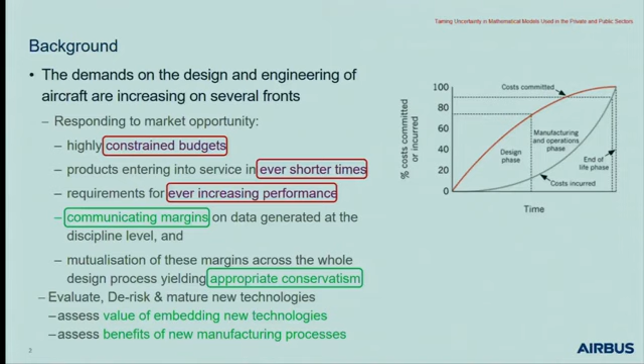But in order to do that, we want to be able to learn as much as we can earlier. And we feel that UQ, uncertainty quantification, is one technique that not only helps us understand where the uncertainties lie, but also helps us learn about what the product might do as it comes into realization.

So what I've done here is highlight the external influences in red and the internal things we're doing in green. Just a quick mention about sharing information - you're right, it's quite often human beings dealing with sharing information and working around the data. But what's imperative is to know what assumptions are in the data itself.

So the key part here about communicating margins is one way of making that explicit, because if we leave that implicit, then we don't actually know what has been done in the past, what margins have been applied, what uncertainty has been taken care of, and we may find that we're over-adding the margins all the way through.

One of the things we want to do is come up with appropriate ideas of what the uncertainty is in the data we have in real terms, as opposed to it just being compounded over and over again. So those are the things we want to be able to look at.

Why do we want to use uncertainty? Well, we don't actually know what the future is going to give us, especially when we're looking at new technologies. So we want to be able to look at the value of embedding those new technologies into our products, and what benefits they might give us in terms of performance of the vehicle, in terms of the viability to buy and operate the vehicle, and so on.

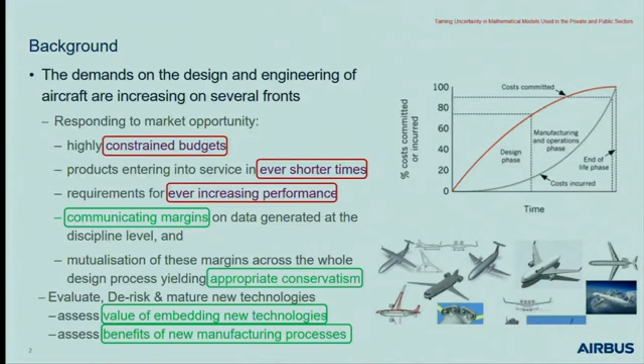So if we're making sure we've committed that right 80% in the right direction, then of course we're going to end up with a product that we actually want and the market wants as well. So we're also looking to project those things forward.

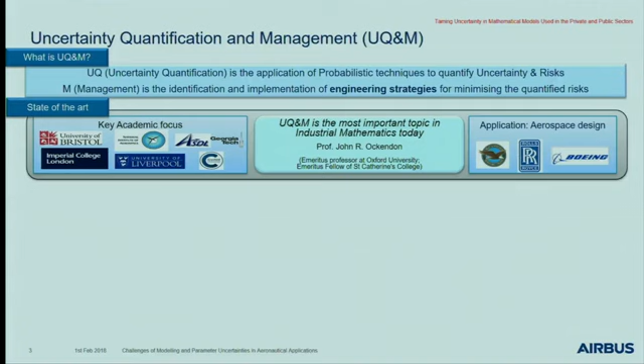So this is taken from a management slide, so bear with me, there are some very basic ideas here. But the key thing we want to put across is that uncertainty quantification is more about the probabilistic approach. And we also use the term management - UQ and M.

Management is about having got that information, what do we do with it? And this is quite a difficult question, because how do you communicate that some analysis has taken place using statistical language, to a bunch of decision makers who may not necessarily be engineers?

Getting that information across that wider group, but backed up by the right level of information, is quite a critical thing for us to do. So the question is, having done all this analysis, so what? What do we need to be able to do with that analysis? And it's a critical part we've been looking at as well.

We've been working with a couple of key partners: University of Bristol, Liverpool, Imperial College, and across the ocean to ASDL at Georgia Tech as well. In terms of the application areas, we know we've got Lockheed Martin, we know we've got Rolls-Royce working on this, we've just seen the results of those. And of course a competitor is also using these techniques too. So within the aerospace industries, it is a growing field.

I think it's an important point from Professor John Ockendon. At the last study group for uncertainty quantification, he made a statement that uncertainty quantification is one of the key topics we need to be looking at from the industrial mathematics side. And I think it's the sort of presentation that Catherine gave earlier that indicated how that is going to be used. So the thing I'm feeling a bit guilty about is the simplistic middle bit about what this actually means, so I'll skip over that.

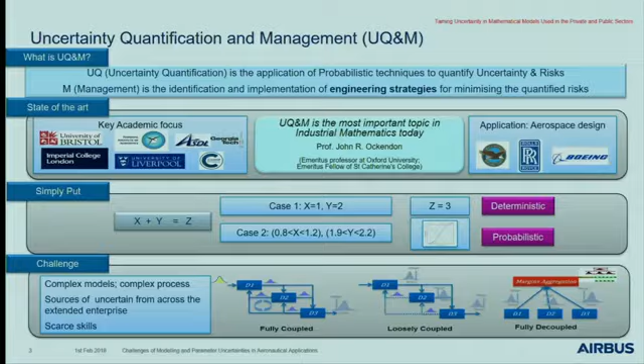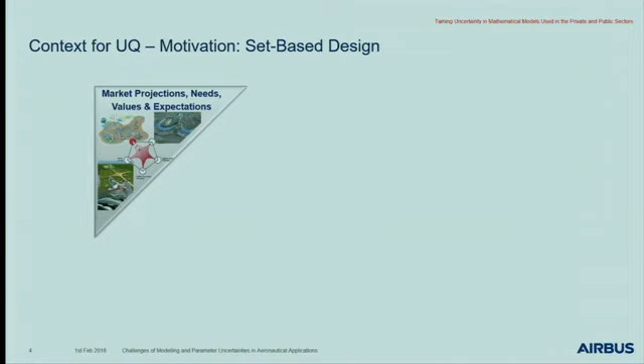I mentioned we're going to talk a little bit about overall what we do, so I've got this as a cartoon which we'll bring through here. It's about the conceptual design, and in the conceptual design phases what we're looking to do is identify a set of products that meet a specific market need. This need may not be expressed as a requirement, not hard and fast. It may be linguistic and vague in the way it's expressed, but there will be some expectations behind it, and some values being sought by it as well. So this creates for us a product placement scenario.

This is what we would like to be able to put in the market to go into place in, say, 10 years' time. So what we can do with that is start thinking about some of the concepts in terms of what the aircraft might look like. But we also have a portfolio of technologies we're working with, and we'll talk to our friends at Rolls-Royce and say, what sort of engines have you got in mind, and how can we use those engines on our aircraft as well?

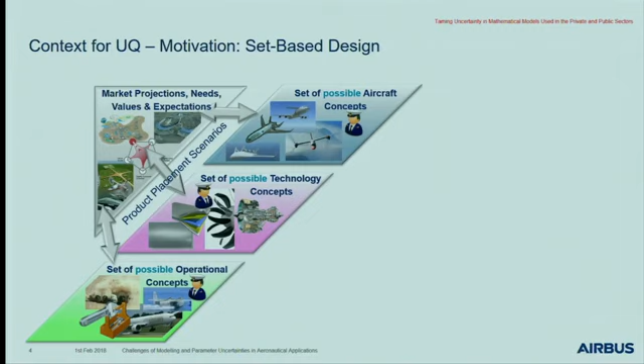And there will be uncertainties associated with that, as we heard earlier. There's also future operations always taking place in terms of how it's going to be operated. By operations, I mean much wider - not only how the airlines will fly the aircraft, what the air traffic control environment might be, but how we might support, maintain, and produce the aircraft. So different concepts are coming through here, and if we take a sum of all those, we can end up with a large number of aircraft concepts to analyze in that multidisciplinary way.

Showing that as a set of axes here, each blob represents an individual aircraft that has a specific technology embedded in it, a specific way of maintaining it, and a specific shape associated with it. What we want to do is use some rapid methods to say which ones are not feasible. So we're not going to make a selection and say this is the aircraft we want to design - what we're going to say is these are the aircraft we don't want to design.

In the literature this is known as set-based concurrent design, or set-based design. The idea is that you always leave yourself a number of scenarios that are still feasible by only getting rid of the ones that are unfeasible. The danger of picking one and finding later that it doesn't quite work is wasted effort, and you have to come back and redesign - so it can be a costly task.

From those we can then create a set of feasible solutions, and because we've narrowed the set from a very large one to a smaller one, we can increase the depth of calculations necessary, and go into deeper calculations, as Catherine showed, with the finite element approach, computational fluid dynamics, and those sort of models. From that we can come up with a feasible set of competitive products that we want to use.

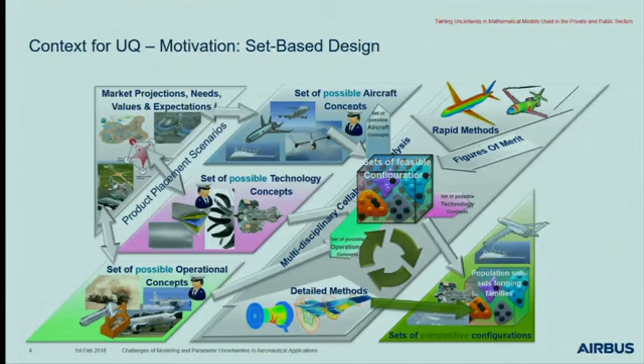Now what I want to do is take a case study of how we apply this by looking at the rapid methods part, looking at the early design, and being able to pick out a large number of engine configurations and airframe configurations, showing how we use these methods to home in on suitable and feasible solutions. I also want to touch a little on the graphics we produced to show what this means and how we might use these things as part of decision making.

So the simple case study we're going to look at is an aircraft that's taking off, going into transition phase, reaching climb, and then going into cruise. One of the things we want to ensure is that the aircraft can fly 24/7 - essentially that means we want to reduce noise. Because we want to operate it on a regular basis, we also want to reduce emissions, and reduce the fuel burn associated with this. So the terminology you'll see is SL noise for side line noise, FO for flyover noise, and fuel burn and NOx will come through as emissions.

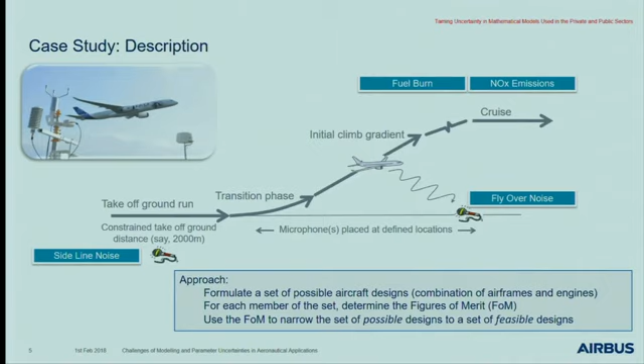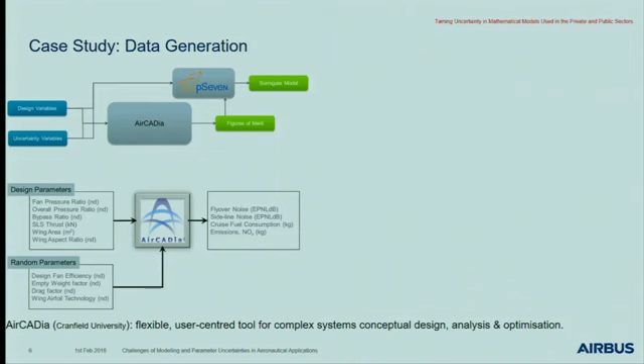So to do that, the first thing is that we generate the data. AirCADia is a computational tool, or framework, from Cranfield University - we used that, and we also used a tool called pSeven, which allows you to do surrogate model building. It's got a number of ways of building surrogate models, and it includes Gaussian processes as well, which we use here.

Now what we've done here is to separate out our design parameters from our random parameters. The reason for this is that we want to treat them differently when we do the full analysis. Design parameters are parameters we can choose. Yes, there are tolerances associated with them, but those tolerances are much less than the uncertainty we have in the random parameters.

And those random parameters are giving some indications to what that future technology might provide us. So if we have a figure of 1 associated with that design efficiency, it means it's the same category as it is now. If it's less than 1, it means it's getting worse. If it's greater than 1, it means the technology is going to offer us more.

So we're able to take lower and upper bounds, and again using design of experiments, make some selections, run it through the AirCADia tool as a simulator to generate a set of points. And then we can use those points to generate a surrogate model, and from that surrogate model be able to do a lot more runs, essentially thousands of runs. So we're treating the data produced by AirCADia as being a computationally expensive set, even though AirCADia isn't, as a means of generating the data and making the separation.

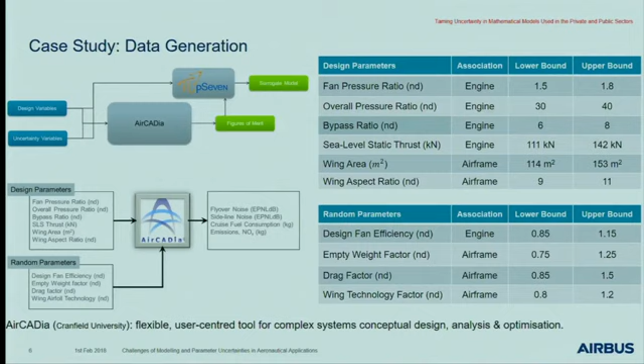And these things are typically used by the analyst, not so much exposed to the decision makers, because it's a level of information they don't need to know. What they need to know is that we as analysts have confidence in the information we produce. However, we do keep this in our back pocket, so if they do need to know what our confidence is based on, we can pull these things up.

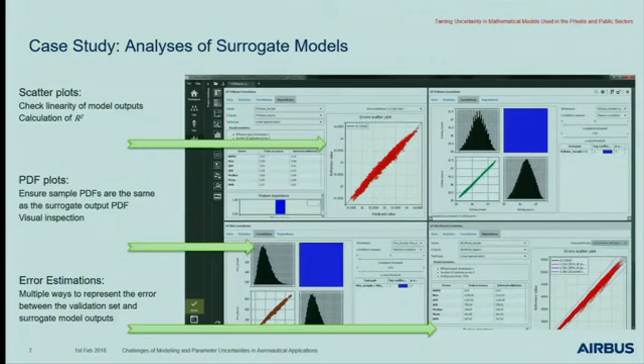Now, what can we do once we've got this? There are a number of schemes we've been looking at to display the results. First, let's start over here and work our way to the left-hand side. We don't actually know what the probability density function is going to be for a given set of technical characteristics of the aircraft, the airframe, or the engine. It could be biased one way, or it could be biased another way. So what we want to do is run different scenarios considering these different types of distributions we might have.

Now, that's useful because it allows us to consider which of these technologies are ones that are going to give us a robust solution against these different figures of merit. And I just give you one as an example here. We'll come back to the others in a second.

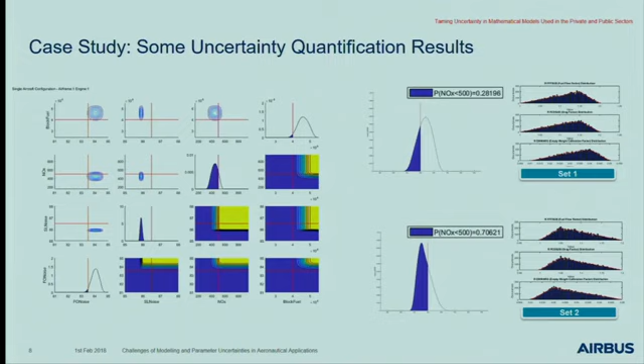But I think more importantly, this type of plot allows us to convert the probability of success against each of the figures of merit to a numerical value that we can then start to combine together. The way we did this was to look at each one - here I'll give one example of the situation for block fuel, where we've got a particular engine-airframe combination that doesn't meet the red line.

The probability of success is actually quite low because we're burning more than we should be the majority of the time. With nitrogen emissions it's not too bad, and with flyover noise we're not quite getting there, and certainly with sideline noise we are, because all of that is well within the limit that we impose ourselves. Against each one we've got, although it's not so clear, the area highlighted in blue.

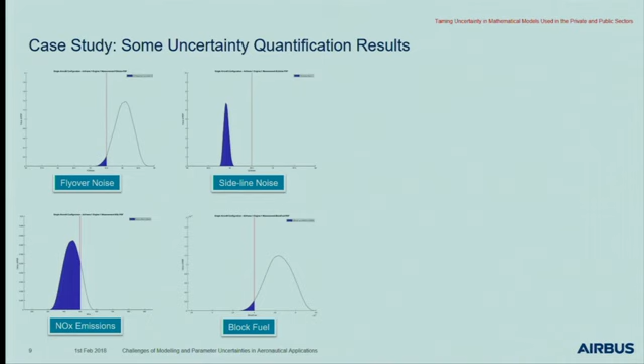So we can do that for flyover noise, sideline noise, emissions, and fuel burn. Now, what's interesting is we wanted to come up with the aircraft-engine pairs that allow us to pick out the ones that are good. So we can multiply those together.

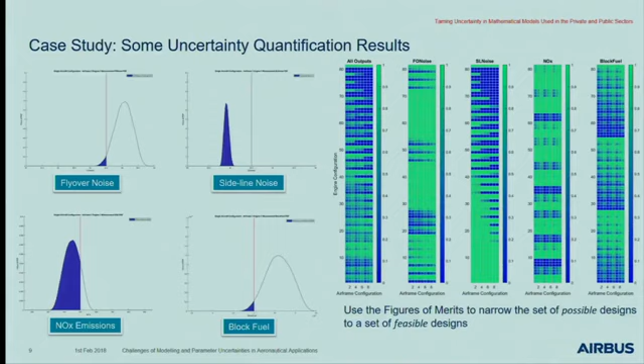So this allows us to play those sort of games and look at the probability of success that the aircraft would meet those constraints if we were to put those there. So what I want to do now is just leave you with a taster of where this could take us. That was a simple example because it's an early stage, and we wanted to show how even at the conceptual stage we can use these techniques.

The wings bend and deflect. It's a mechanical aspect, so how much do we allow it to bend? We've got structural interfaces as well, and kinematics limits to where it can move and where it can't, and if the wing is swept back, how it's going to move and still give you the aerodynamic aspects.

A lot of these now require a lot more processing power. Along the lines of what Alexander was saying, to combine these several characteristics together does mean we've got very high computational powers needed, and it can take up to a week or two, or in some cases just to prepare the models up to a month to make those runs and get the figures out. So that's really where we're going next with the application of uncertainty.

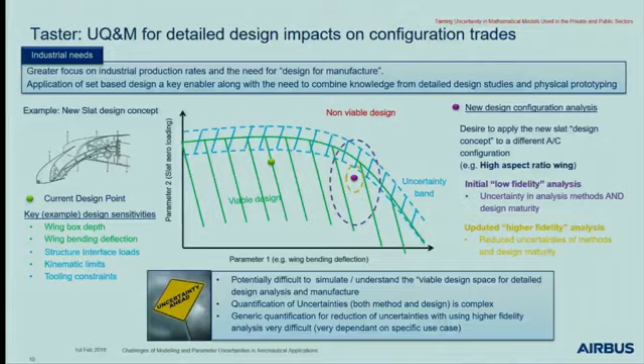I just want to end very quickly on what some of the challenges are. After all, the presentation was about challenges as well. Problem formulation is always a key problem. It's not about the linguistic formulation, but what is the mathematical problem we're actually looking to solve, and what would constitute a good answer to it.

Decision theoretic is another one. Having got that information, how do we then convert that into a narrative that enables the decision makers to feel comfortable about the sort of decision they need to make about the product?

We already talked about modeling parametric uncertainties. Hierarchical models of UQ, I think, is something we just discussed as well, how do you take that into account? The inverse problem - I was very heartened, Peter, this morning to actually make that link, which I hadn't done before - of how do you allocate those uncertainties to the right areas, some of which may not be controllable. So if you're able to spot that in terms of what the inverse solutions might be, it becomes a very valuable way of working for us.

Sources of uncertainties - we mentioned some, but there are others that we perhaps haven't discovered yet. We do have a high dimensionality problem. As we get deeper and deeper into the aircraft design process, we have more and more degrees of freedom, and those degrees of freedom create those high dimensionality problems. We do, as was mentioned earlier, have incomplete and noisy data sets to deal with, and large volume - by big data here I mean looking at it from a perspective of how one analyzes disparate sets of data, as opposed to necessarily the volume of data.

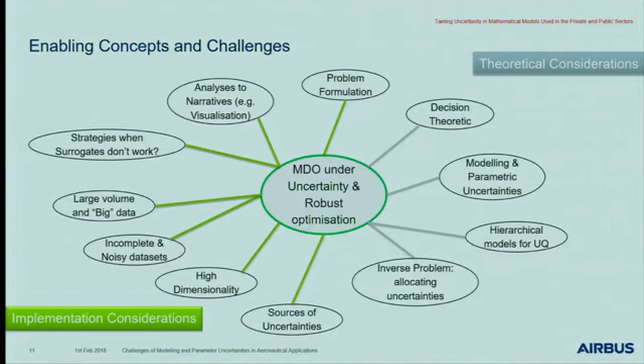And lastly, analysis to narratives. I think this is the sort of thing models of decision is covering as well. I did have a chat with Professor Bowman as well about how we visualize this information set, so this is something we're looking forward to meeting up on. I'll just leave you with information you've already seen as overall conclusions of some of the areas we're looking at. Thank you very much.

Do we have time for questions?

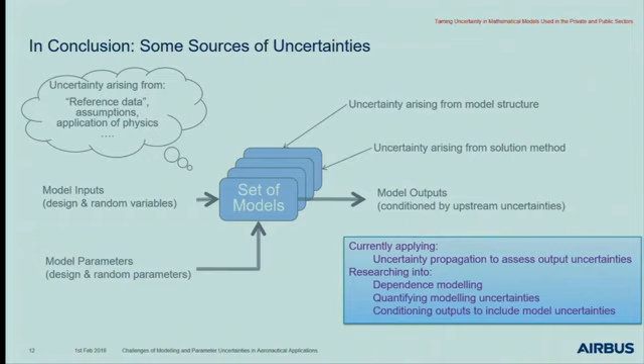Question to both of you, really. You've given a nice overview of how complex this whole modelling situation is, and you talked a bit about people having problems communicating because they're working on an individual part of the problem. Is part of the problem education? Do you find that you're able to recruit graduates who have the skills to do this kind of stuff, or do you have to train them on the job? Do you think the way we train students on mathematics degrees, statistics degrees, is enabling them to come and work in companies like yours to help you with the kind of challenges you've highlighted?

Shall I take that first? I think there are a number of things associated with that, and it's not easy to pinpoint one of those. One is that there's a historical track record.

We are a regulated industry, and we have methods and tool sets and people trained to use those methods and tool sets to enable certification of the aircraft. So that makes it difficult to change the processes.

When we do look to change the processes, we've created a rod for our own back, because the people we recruit from are the traditional disciplines. So getting people, even if they are rightly trained in that arena, we may not really have written the job description correctly to enable that to happen.

In terms of the training, I think those people we do get with that training coming in find themselves constrained straight away, because they're not able to have the freedom they needed to apply those new methods, because of those historical aspects and the inertia it takes to change them.